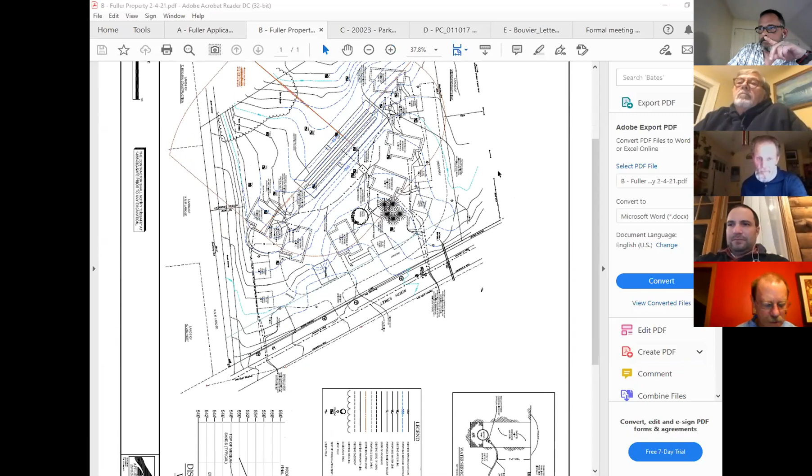What I have is June 8, 2020, a drawing by LaRose - Alison Parker, trustee of the Alison Parker Living Trust. Plan showing site plan, lands of Alison Parker, trustee of the Alison Parker Living Trust. Yeah, I have that. That's the proposal now. Correct. And that is the same site plan that is on file, with the only difference being the addition of the 6 garages here.

But I have a question. I see the garages, but did the original site plan, which we don't have, have the internal access road? Yes, that was all there, just weren't... okay, yes, and 3 parking spaces per house.

Can we see the other plan? There were 2 plans submitted, one that has these additional garages and one that doesn't. Can we look at the other one? I'm trying to pull it up right now. It's a survey, not a site plan, and it just has building envelopes, nothing else. I'm trying to see if I have it.

This was done by Ron LaRose. It doesn't even show the entire road. No, it didn't. That's why I was asking whether it was previously approved with the road. So is what we're looking at now the original site plan, Chris? Can you tell? This is the plan.

I'm not gonna lie, I asked a bad question. Let me rephrase. Is this the June 8, 2020 plan that we see here, the existing approved site plan? What we have here is the Mylar of the survey, which is the plat that is on file, the site plan that is on file.

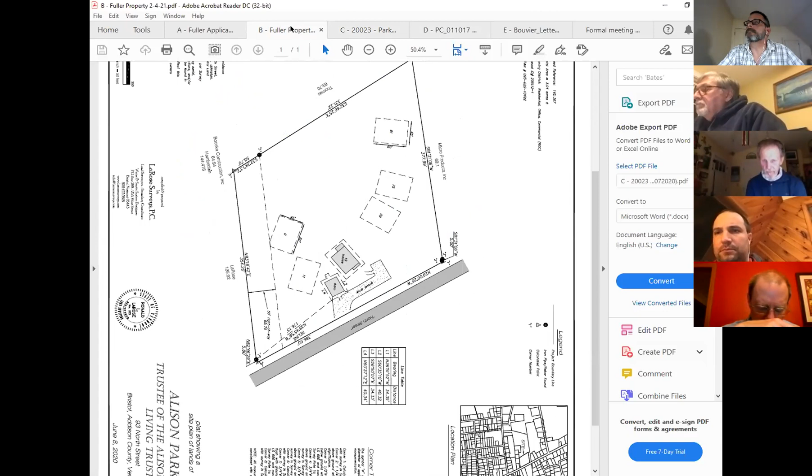Okay, yeah, I can see on the site plan that the building locations are in somewhat different places. Well, here's my concern.

PRDs are planning tools designed to allow for comprehensive development where you're not subject to all the strictures you would be on an individual lot. It all works together in a unified way, and it requires certain restrictions - setbacks, site coverage maybe, density maybe, number of lots, all those kinds of things.

So what I'm looking at - I understand from the minutes and from what Mr. Fuller just told us - the individual lots are a building envelope, correct, Mr. Fuller? So you've sold one and you've deeded to the buyer a 45 by 60 building envelope? Correct.

Okay, so where are these proposed garages in relation to the building envelopes? Are they entirely contained within them? We can't tell. No, the garages are going to be on the common land. Well, that's already been written into the declaration.

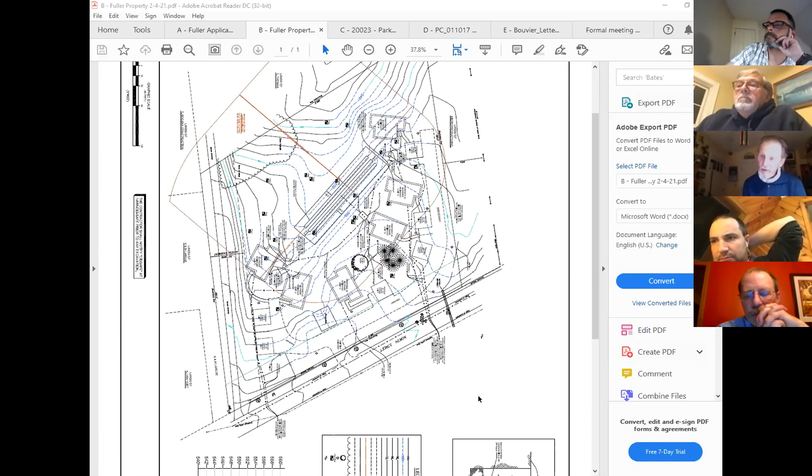Robert, are there elevations of these garages, what they look like? No. My vision is if you go by Livingston's down on the corner of 17 and 116, right in the middle of the yard there, one of the biggest buildings is a 2-car garage. It has a shed roof off one side and a dormer on the roof, but it's 24 by 24 - a nice little unit, and I've suggested it to people who said they want a garage. It comes with a pressure-treated lumber floor, but at that size it has to be put on a concrete slab to remain stable, and it costs about $50,000 or $60,000.

I thought that was a pretty good deal for somebody who wants a nice, neat garage. And it's a very cute little structure. The one they have down there has the same kind of board and batten siding, painted red, like the house we built on the north side of the barn.

Would you mandate that whatever appearance you decide on would be the same for all of them? I don't know if that's something we can decide on. We already have this other thing here, and as long as it meets height requirements, appropriate setbacks, isn't too large. I did a little calculating—what zoning district is this in?

I think we do have some concerns in site plan approval about what the building is like, the landscaping, drainage, lighting, and all those other issues. So you may not have done that in the past, but those are part of the criteria now. Yeah, I think that's right.

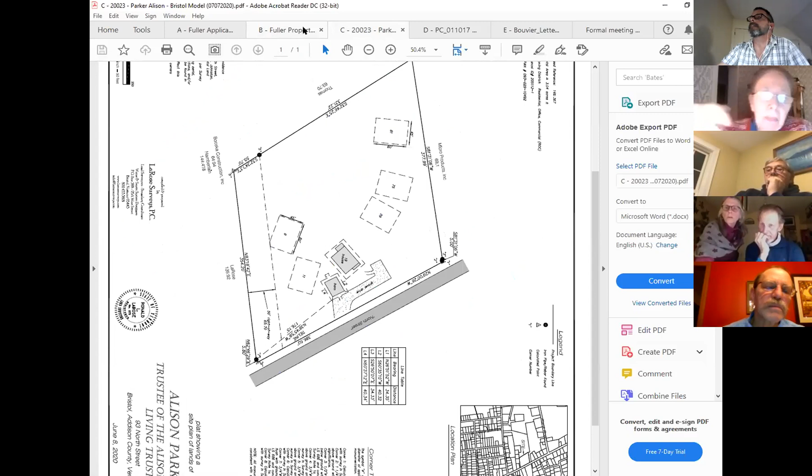So over 90% of this is HDR. All of the actual development where you see the building proposal is in HDR.

Anyway, so I calculated whether adding these garages would bring it up over a too large lot percentage. And what I get is, even with the garages, it's about 15% of the lot would be covered with buildings, with the house envelope plus the garages. So it doesn't cover too much of the lot.

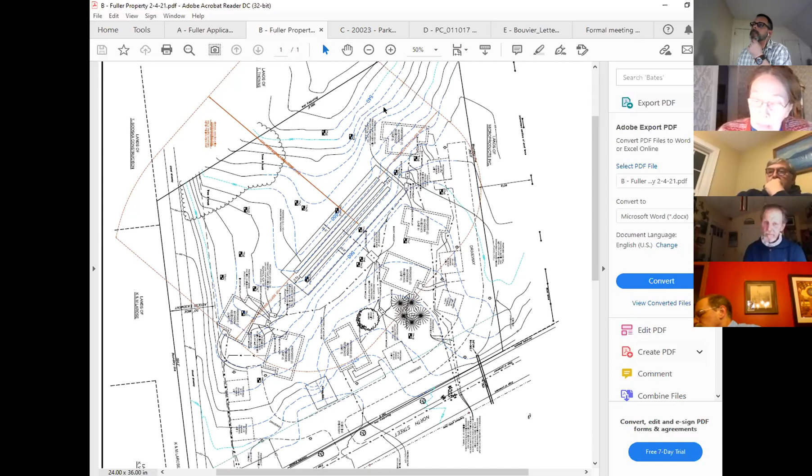We have found that there are no covenants, definitions of open spaces and things like that. So all we need to do—I don't know what that means. It depends on what the original proposal said about what's going to be open space because of the clustering here. Who has that?

Do we have a record of that, though? Yeah, there's a record of what was submitted, and we don't have it. No. And that's our problem. Well, it's a problem trying to decide.

Yeah, no, I mean, I can't tell. And I think my personal view is I think we need to be able to tell if this proposal actually requires an amendment of the existing PRD permit approval. It may well, I expect it does, but I don't know that. I think it's more than just a site plan amendment.

Yeah, or at least it may be. I'd certainly want to understand—how Kevin Brennan, who I know decently well and think a lot of him—I don't have a real understanding for myself of how this project works together as a whole with respect to land ownership. And I think we need to be able to confirm that in order to figure out whether it's simply a site plan amendment or an amendment to the existing PRD required.

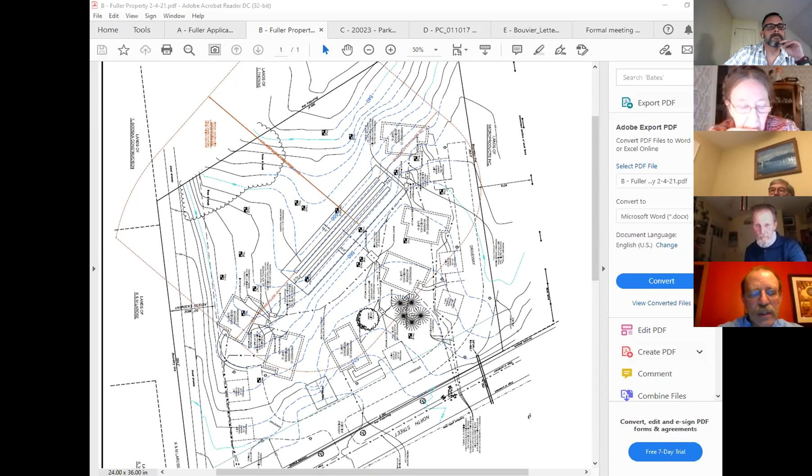My thought would be, it would just make sense to continue to a date certain so we could get all that material in front of us, because I don't like trying to figure it out this way and having to make Chris scramble to read things to us. There's probably a fair amount of documentation there that was provided along with it.

You know, Chris is correct that sometimes you have a common building as well, but that's not what's going on here. That's not what's proposed. So I'm not saying it's illegal or anything, but I'm saying it may be. I would like to confirm for the board to be able to confirm for itself that it fits within the existing permit or it doesn't. And if it doesn't, then the existing permit needs to be amended or considered for amendment, and the site plan approval would be part of it. That's how I'm looking at it, gang. What do you guys think?

I have a couple questions, John, if I could. Sure, go ahead. One question would be, and I think I'm just echoing what you might have just said, but if there's a sort of discrete package of what was submitted and used for the application earlier, as it appeared the day it was submitted, that would be helpful.

That's what's approved. Yeah, I have several questions that would probably be answered by that. One is, what is the overall lot size? A little over 3 acres.

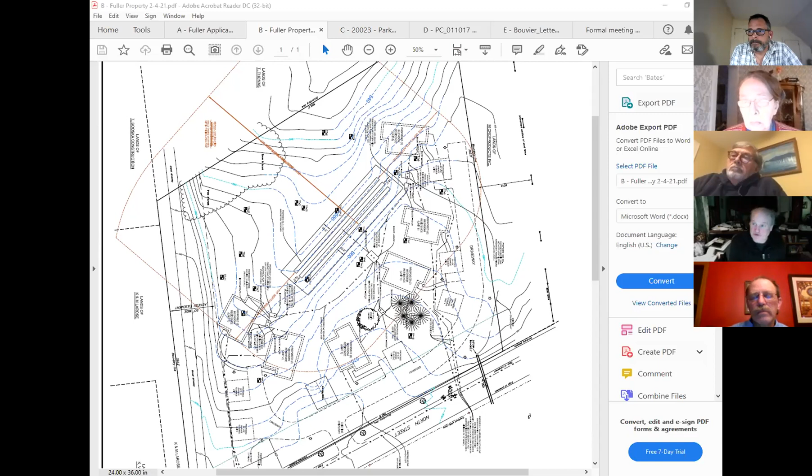So one of my questions then is, assuming that that's the case on the board back then, this is a question that doesn't have to be answered right now, but if these six garages had been on the original plan, would that have changed the board's thinking one way or another? So that's one of my questions. Would it have not affected the density or anything like that, or would it have? It might have. I don't know.

Hey Chris, can you take down the question? Map. Sorry.

I was asking Chris to take down the site plan that we're looking at because I can't see the board. Oh, sorry, yeah, thank you.

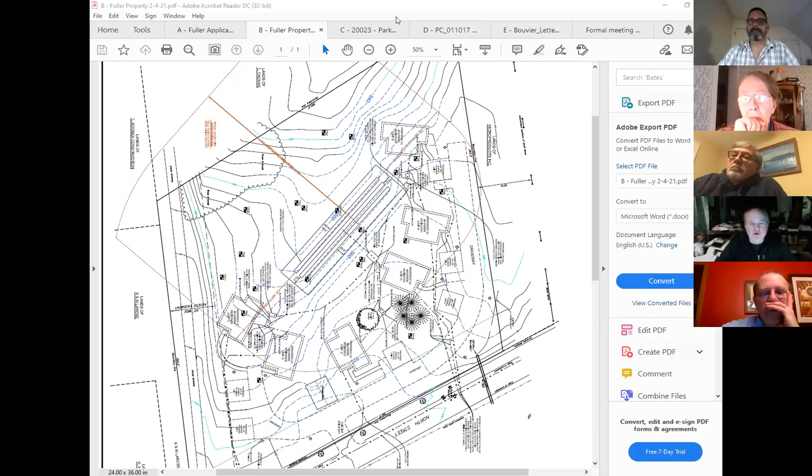My other question is about process. My understanding is that we have a new set of zoning regulations now than we had when this was proposed. I don't know if we would consider it under the old rules or if we're bound to the rules that exist today. They're not very different, well, substantively. They actually were, because this was approved under the zoning two iterations ago.

Oh, okay, I had looked at the 2017s because that's where the minutes were from. So I didn't go back far enough. The new zoning was approved between the application and the hearing, so the 2012 zoning regs were applied to this hearing. That's why it's a PRD, and PRDs ceased to exist as of 2017. So that is my question: under what rules are we considering this latest application?

We're considering it right now as simply a site plan amendment, which was permissible in 2016 as well, although the planning commission, I think, dealt with it, because I never remember dealing with site plans. But in any event, I hadn't thought it through a lot.

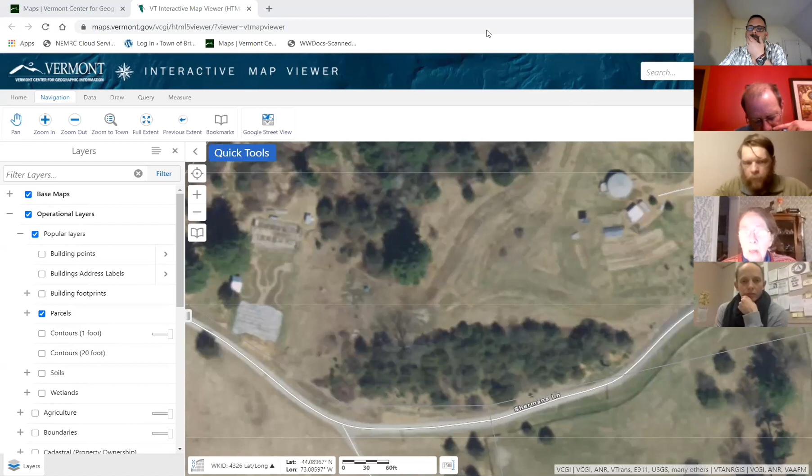Right now you have, I think it's 15 students. Do you see growth happening? For this year, we don't. And if we were to grow at all, it would just be we'd add 1 or 2. We wouldn't grow any more than 16, we're beholden to wastewater permitting and stuff like that, but definitely not this year. And we'd come back for approval for that. And these kids are little enough that they're not on school buses, right? Right, yeah, it's 3 to 5 year olds.

Well, let's stop there a minute because we can give Chris some discretion too. I don't necessarily want them to have to come back if it's 1 or 2 students. No, they don't have to, for as long as they can fit them in the building. Exactly, as long as they meet all the regulations. I think we give Chris the authority to, if we grant the non-conforming use, I don't think you should have to come back, Tasha. They don't. I think John's quite—

There's suggestions in the application that there would be an expansion later with additional building, and they'd have to come for a permit for that. Right. But once we approve the use, it doesn't matter how many, they can do the building, and even the students. I mean, if it became 100 students, they'd need a new building permit and a site plan and all that. But whether this existing building has 12 students or 18 doesn't matter as long as we approve the use.